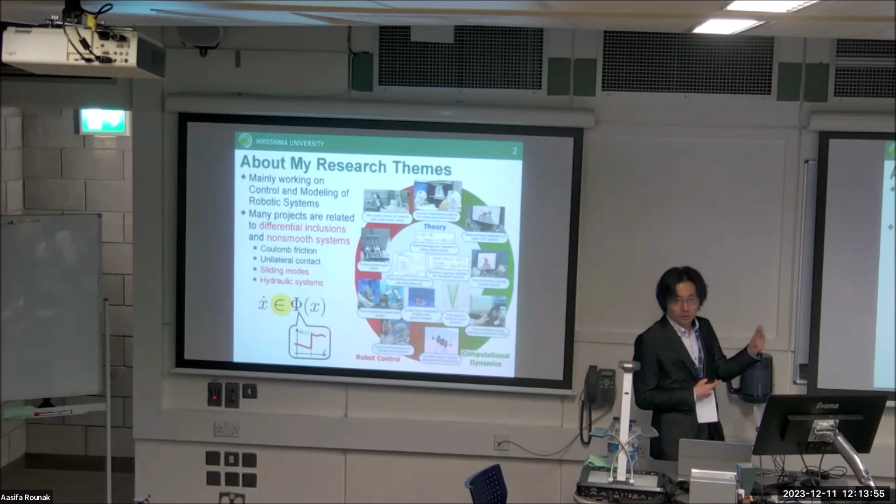But recently, I started working on hydraulic systems, and I noticed that hydraulic systems can also be described as differential inclusions using set valued functions. I applied that way of thinking to the modeling and also the control of the systems.

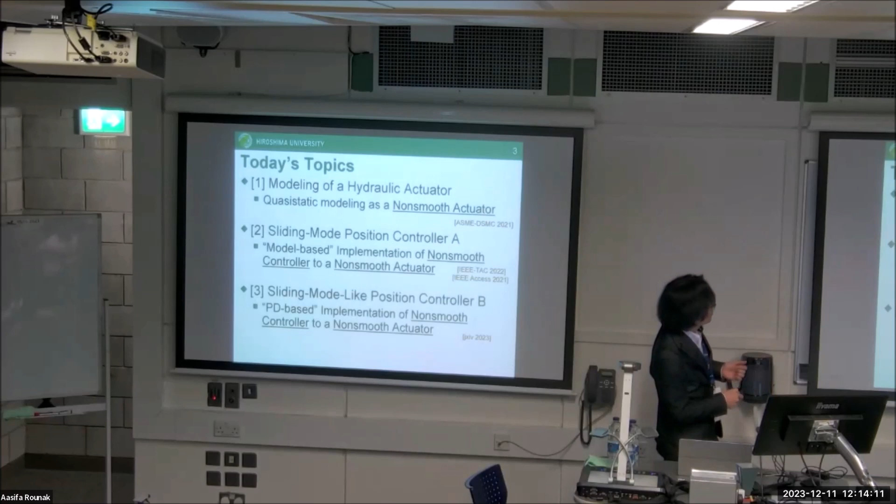Today's topics, there are 3 topics, and it's a very quick overview of 4 of my previous papers. One is still under review, and one is modeling of hydraulic actuator. I say it's quasi-static modeling, and I modeled it as a nonsmooth actuator.

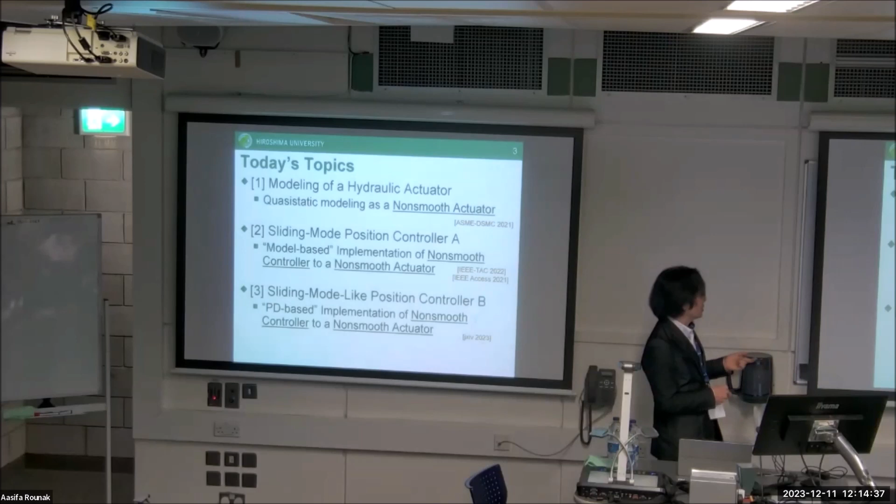I applied sliding mode position controller to such systems. As you might know, the sliding mode controller is a nonsmooth controller. It can be said to be a nonsmooth controller applied to a nonsmooth actuator. And I invented 2 ways to implement such controllers, such actuators.

Okay, the first one is about the modeling of hydraulic systems. The motivation came from collaboration with a construction manufacturer of excavators. You might know this kind of excavator - it's Kobelco Construction Machinery.

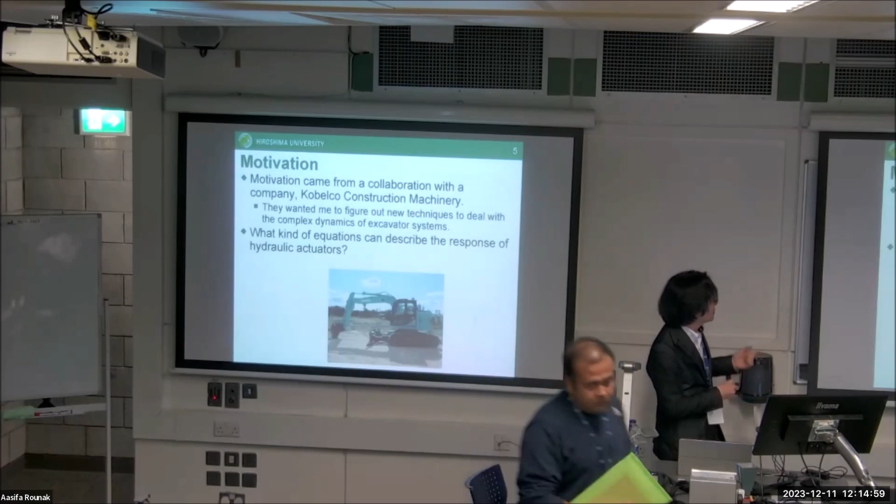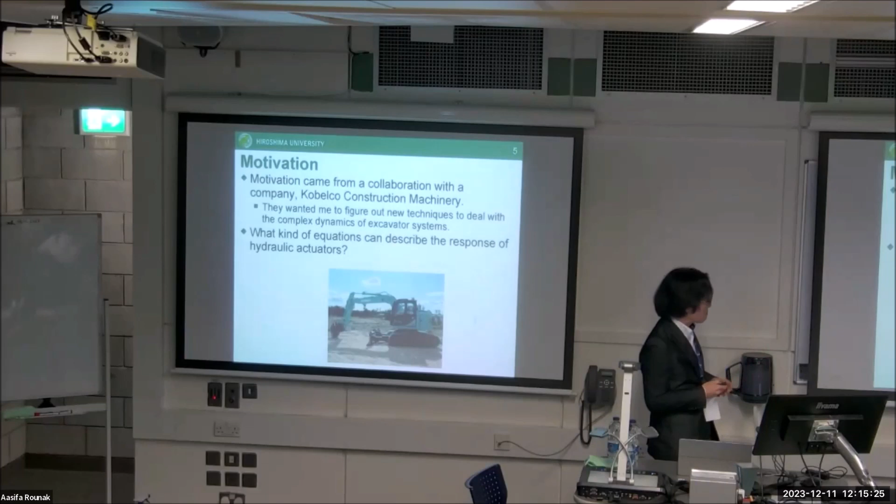They wanted me to figure out new techniques to deal with complicated dynamics of excavator systems, especially hydraulic systems. They invited me to operate the excavator, and I found that the response of the excavator was very interesting, and I couldn't figure out what kind of transfer functions could describe the response. So my academic motivation became: what kind of equations can describe the response of hydraulic systems?

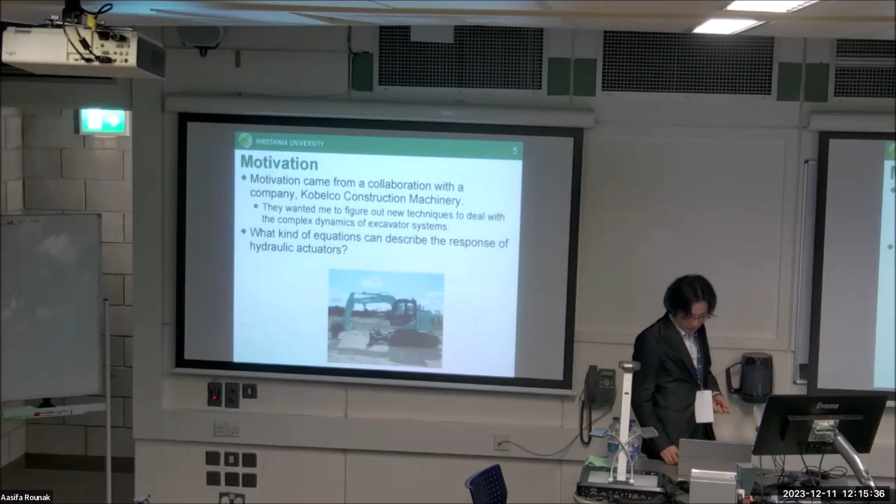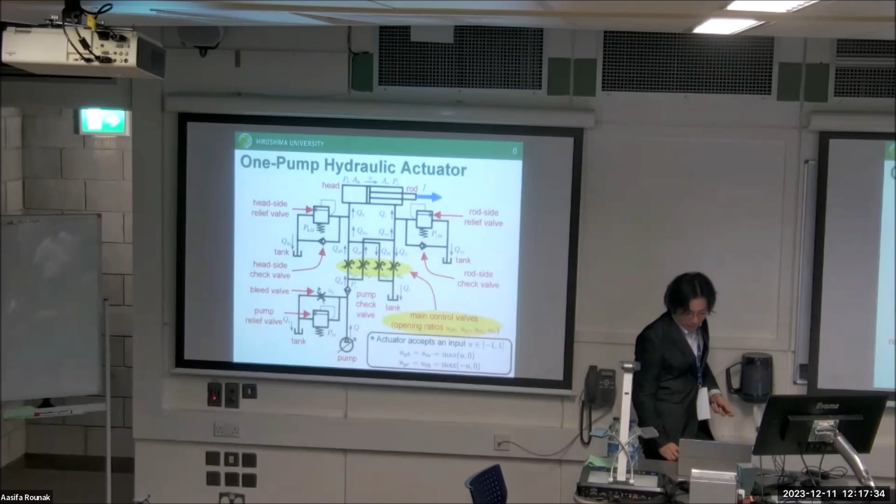Okay, this is a quick explanation of how it works, and it is nonsmooth. Nonsmoothness happens especially when all valves are closed. When all valves are closed, it doesn't move. But when there is an external force applied here, the oil must escape from these relief valves.

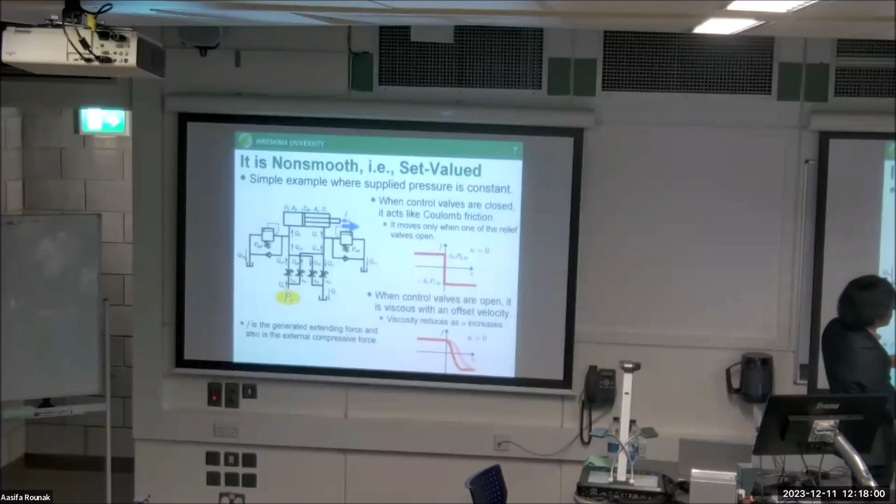So it acts like that. It means that when velocity is zero, the force can be any value between the relief level. When the external force exceeds this level, then the actuator starts to move like that. The same thing happens in the opposite direction. So it exactly acts like a Coulomb friction function.

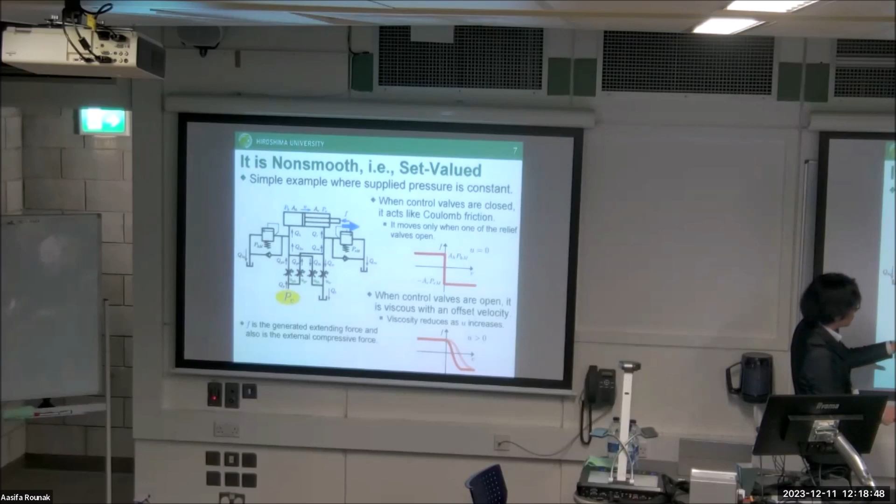Also, when these valves are open, it acts like a nonlinear viscosity with saturated force, and as the opening ratio U becomes large, it becomes less viscous. The viscosity takes place because of the resistance of these valves.

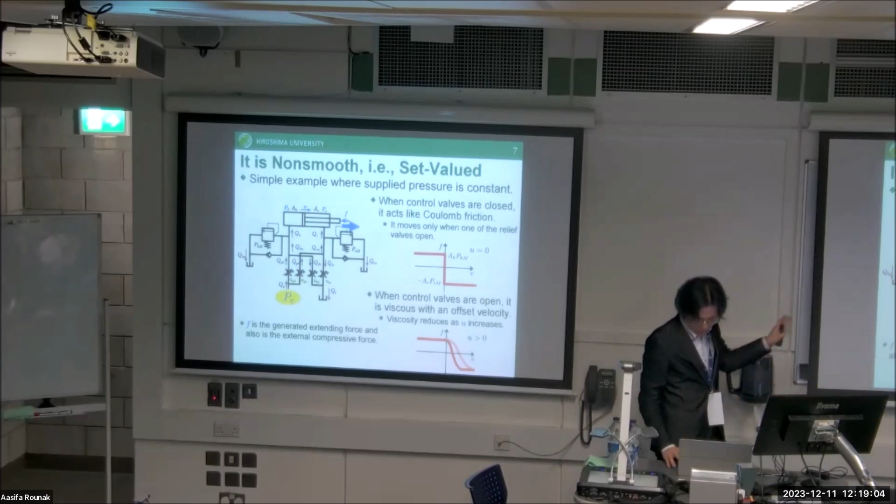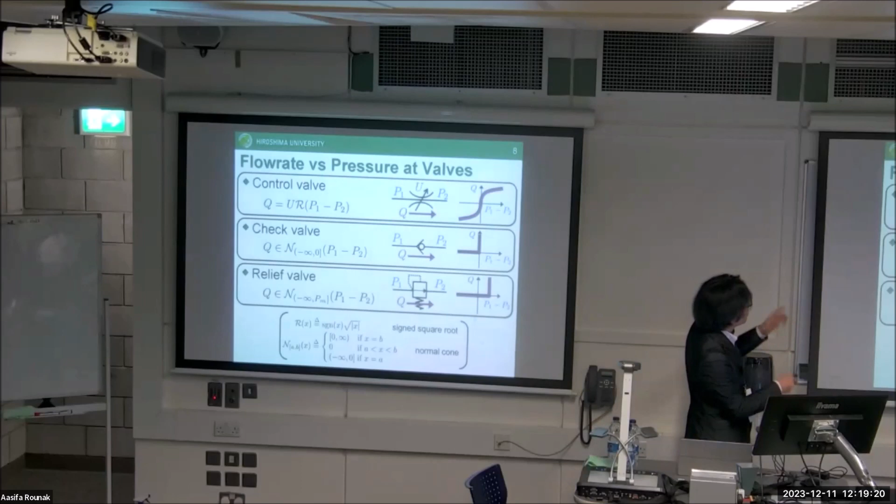This is a very quick, intuitive understanding of this system, but I try to express these features mathematically, and at the component level, at the control valve, we have to consider the pressures and flow rate relation.

And there is a control valve like that. There is a pressure on this side, and there is a pressure also on this side, and the pressure difference causes the flow of oil.

And the relation can be described like that. And this R function, it's what I define. It's a signed square root. Okay, and this is a kind of typical way of representing the flow rate.

And check valves and relief valves can be described like that. It's exactly like a diode in an electric system. And we can describe the relation by using the normal cone functions, which can be defined like this.

And yes, it means that the flow is allowed only in one direction. So negative flow is not permitted. So the pressure difference and the flow rate can be connected by this kind of set valued nonlinear function.

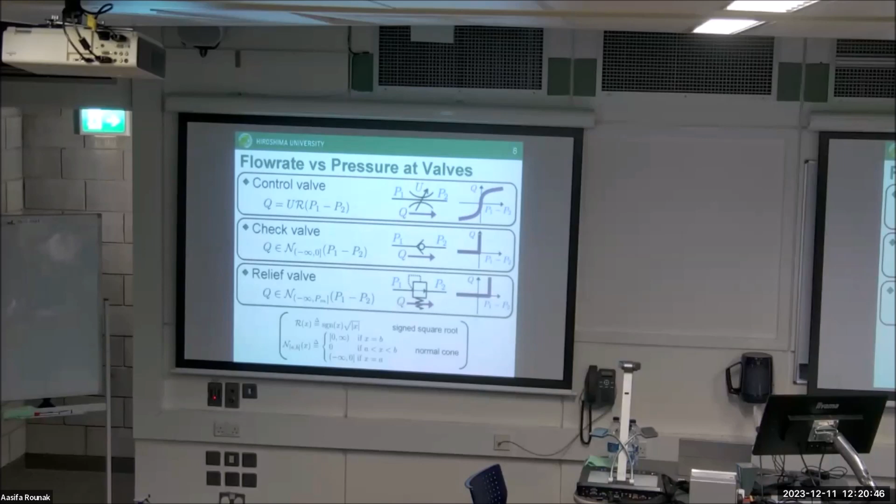And the relief valve is also similar. It's like that. So the difference between P1 and P2 is upper bounded by this, like this.

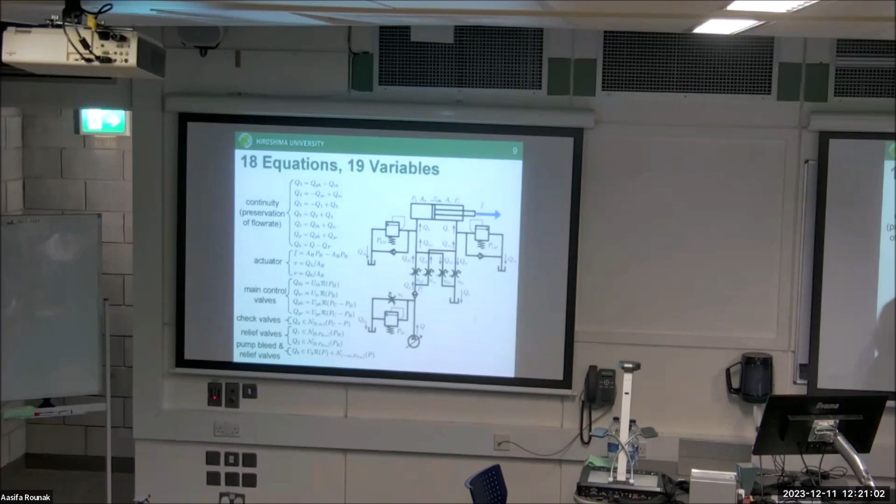And I applied this way of thinking for the whole circuit, and we obtained 18 equations at each valve and each junction of the circuit. And some of them are equalities and some of them are inclusions.

And there are 19 variables, such as the flow rate of each part and also pressure of each part.

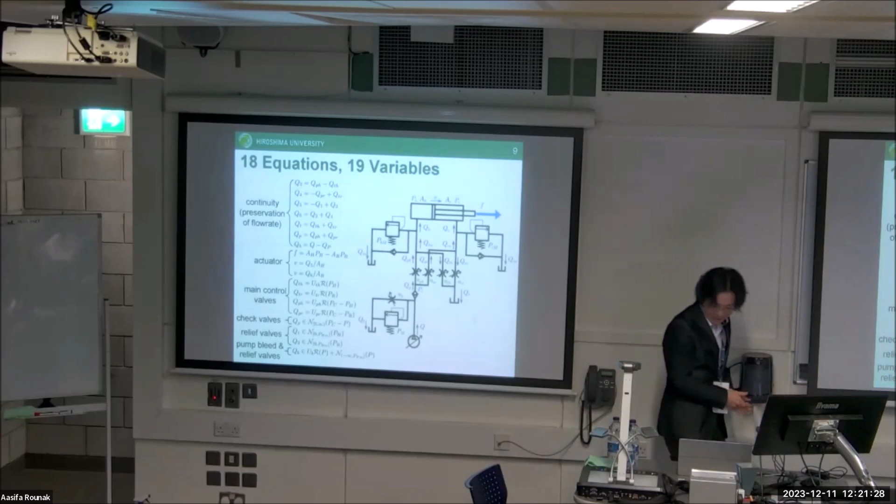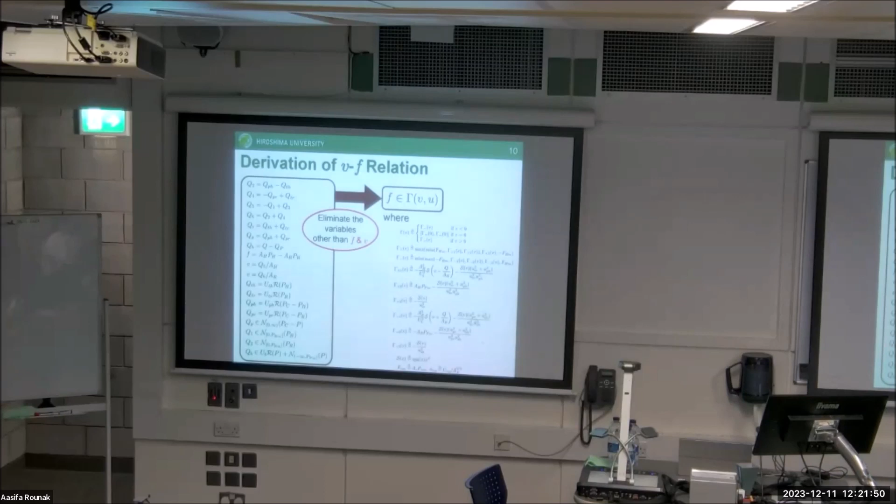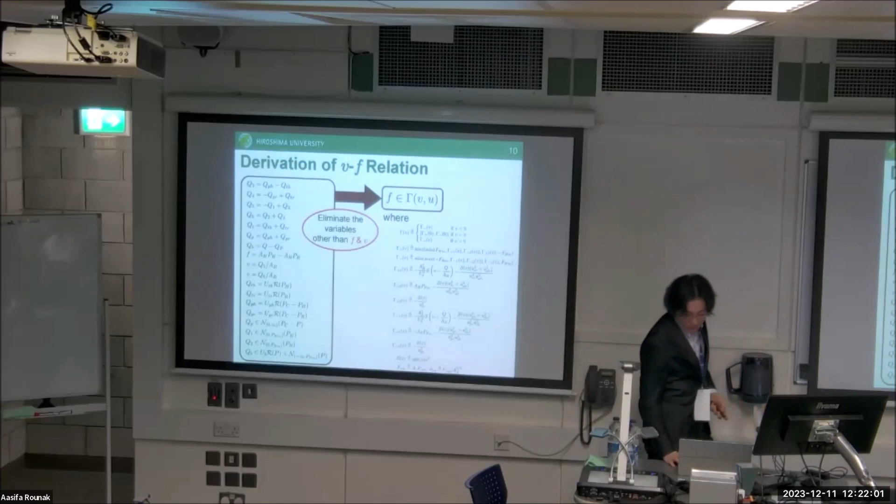And this function gamma, it is the set valued function. It can be defined like this. And it looks complicated, but it gives us quite an intuitive picture about how it works.

And it is basically, with a particular value of U, its graph becomes like that. It's a connection of several curve segments, like this. And each segment has physical meaning.

For example, in this section, the relief valve is open, and in this segment, it's an effect of the check valve in the circuit. And there are some segments, depending on the condition or open/closed states of some valves.

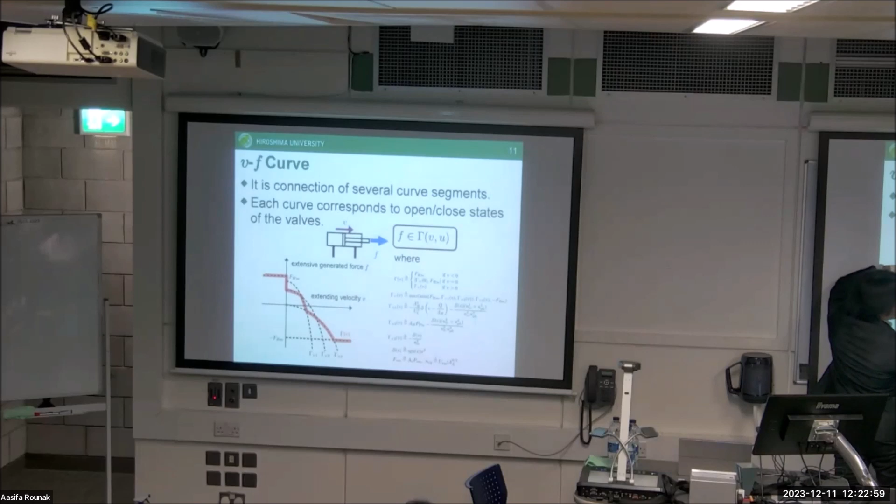And the important thing is that the force is bounded, upper bounded and lower bounded, and there's some set valuedness, non-smoothness here. And this curve changes according to U.

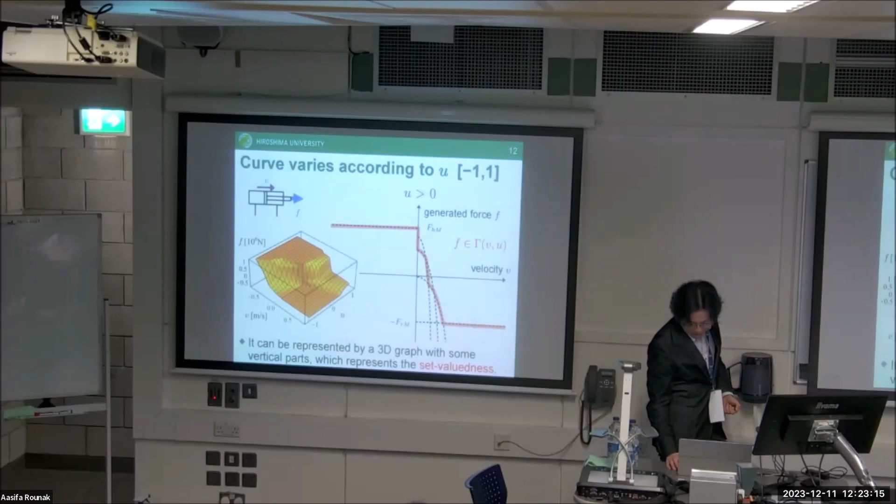Well, if we map this into the three-dimensional graph with velocity, force, and the control input U, it becomes like that. So there are some vertical parts, and it represents the set valuedness, meaning the non-smoothness.

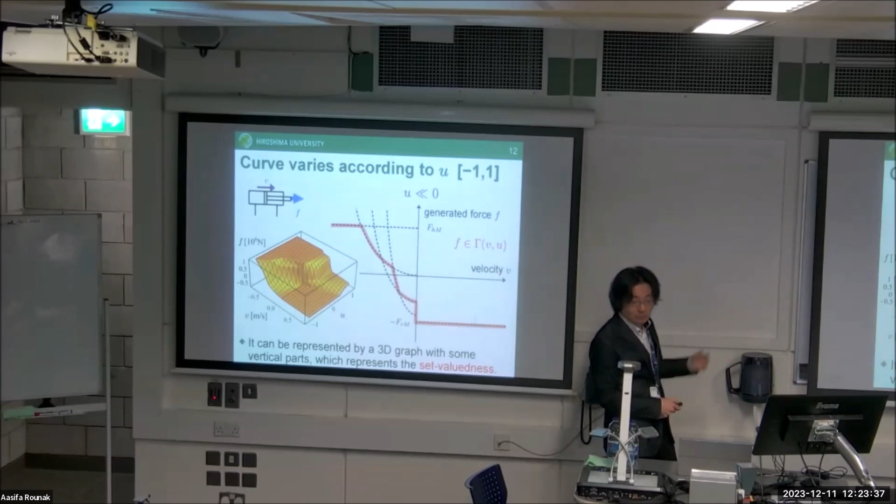Okay, then now we got the set valued actuator, but set valuedness means that the force can be any value between some value and some value, but it sounds like the force is not determined. So the force is indeterminate. Actually, when the actuator itself is alone, not connected to anything, then we cannot determine the force.

But when it is connected to something else, we can determine it. For example, in this case, we assume that the mass is connected here, and there is external force G here, and then there is the equation of motion of this object, and this force is the actuator force.

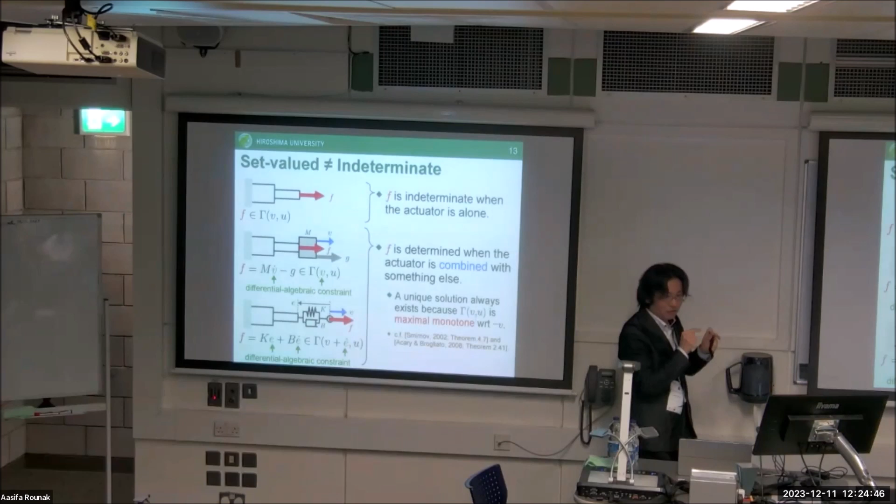So the actuator force comes from the actuator, the non-smooth actuator, and so here we have V and V dot. It means that there is a differential algebraic constraint, determining V, and once we determine V, we can determine F. So it doesn't mean indeterminate.

It does not mean that the force is indeterminate. And a similar thing can be said about this situation where it is connected to spring and damper, and in such case, the spring damper force is here.

So here we have also a differential algebraic constraint with respect to E. So we can determine that. We can determine E, and also we can determine F.

And so you may wonder if there is guarantee of uniqueness of existence, but it is relatively easy because the gamma function I showed you in the previous slide is maximal monotone with the negative of V.

So it's quite easy to prove that there is always a solution. And if we want to do simulation of this system, we can discretize that.

This equation of motion is discretized by the backward Euler method, with discretization using the sampling time step size t, and we have this equation constraining the unknown f, which can be solved like that.

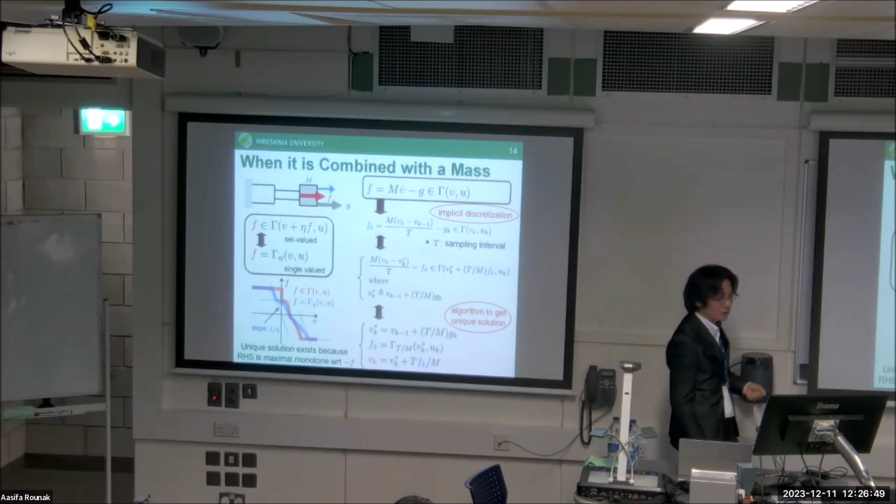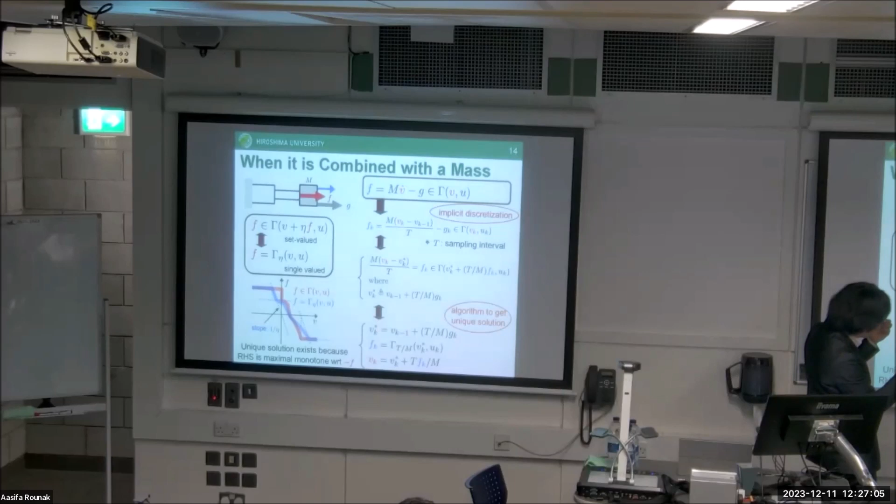To do that, we have to define another function gamma eta, which is a slanted version of the function gamma, but it's single valued and can be defined uniquely. By using that, we can describe the discrete time solution, this algorithm to compute and integrate that in discrete time.

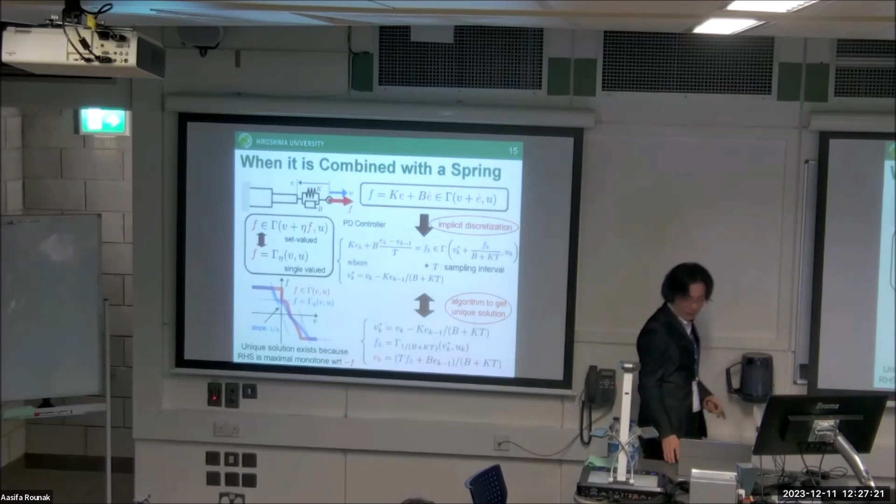The same thing can be said about this system with spring, and we end up in this algorithm. We applied this one to develop a real-time simulator based on the second version, the connection with spring damper system, and now we are using that for preliminary checking of the controller.

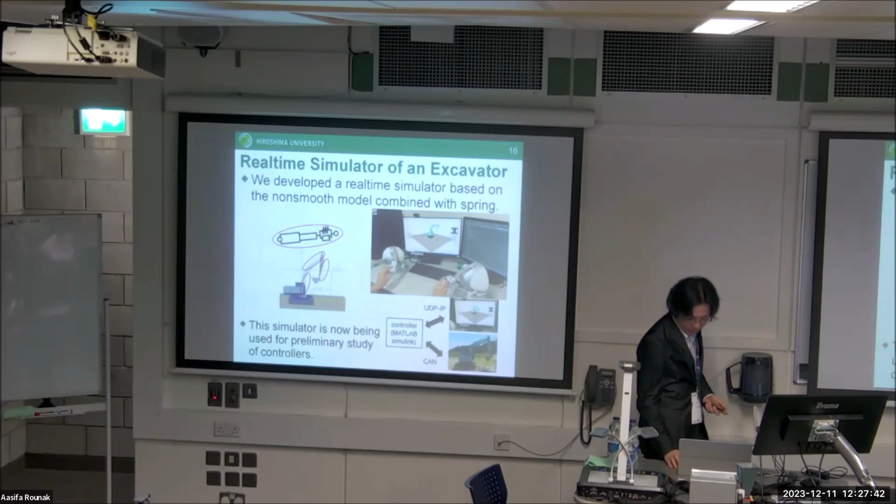Okay, and this is the first topic. The second topic is a model-based implementation of sliding mode controller, a non-smooth controller, for non-smooth actuator.

Now we have a non-smooth actuator, and we have to control it. Specifically, we have to control the position of the actuator. We assume it is connected to a mass, and the position can be measured by a position sensor. We have to construct a controller to make the position follow the desired position PD.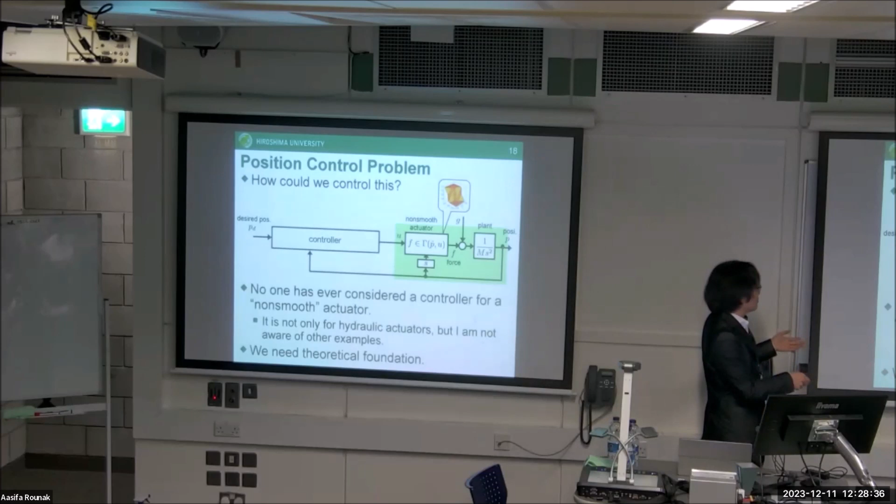No one has ever considered such a non-smooth actuator. It is not only for hydraulic actuators, but maybe there might be some other non-smooth actuators, though I'm not aware of other examples. Anyway, we need a theoretical foundation to develop this controller.

In such a case, the straightforward way is to manipulate the force that the actuator can produce. If the reference force can be commanded from a controller, then we can use some common position controllers. Let's say we have a common position controller F hat that produces F hat, this reference force, and if this reference force can be translated here, then we can control that.

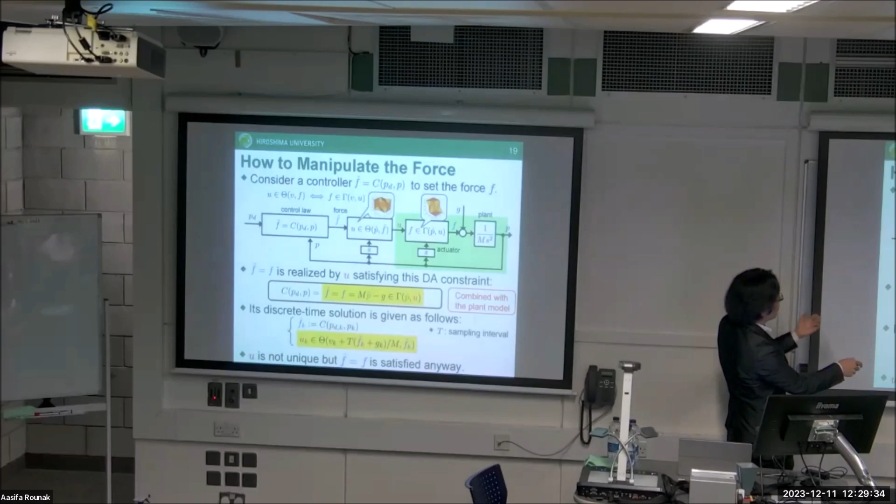But there is something different here, and we can put some inverse function of gamma here. But we cannot guarantee, it's not clear how F hat, F and F relate, we cannot guarantee that they are equal to each other.

We have to remember that this is determined by the differential algebraic constraint in the plant, which means the actuator force and the equation of motion of the system, if it's determined by this constraint, we have to use this information to determine F.

In discrete time, as I showed in the previous slide, the discrete time algorithm computes this part, and we can put this here, and then construct a controller like this. This is the basic way of thinking to construct the model-based implementation of this system.

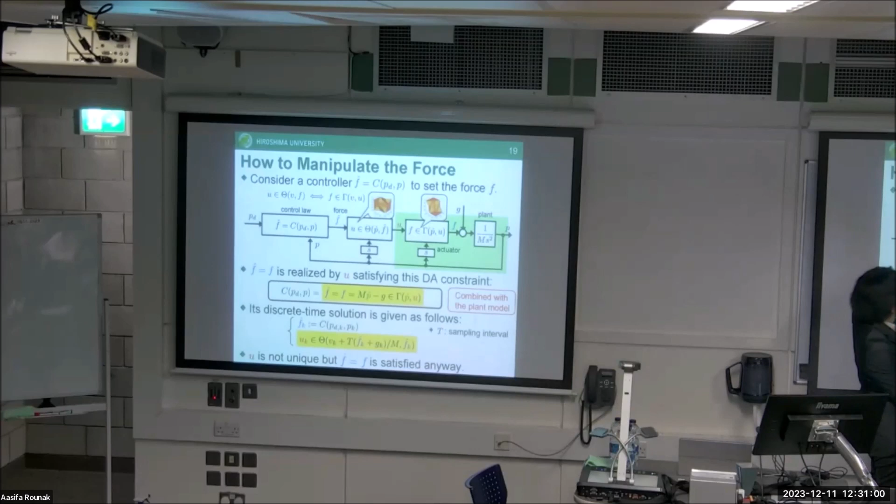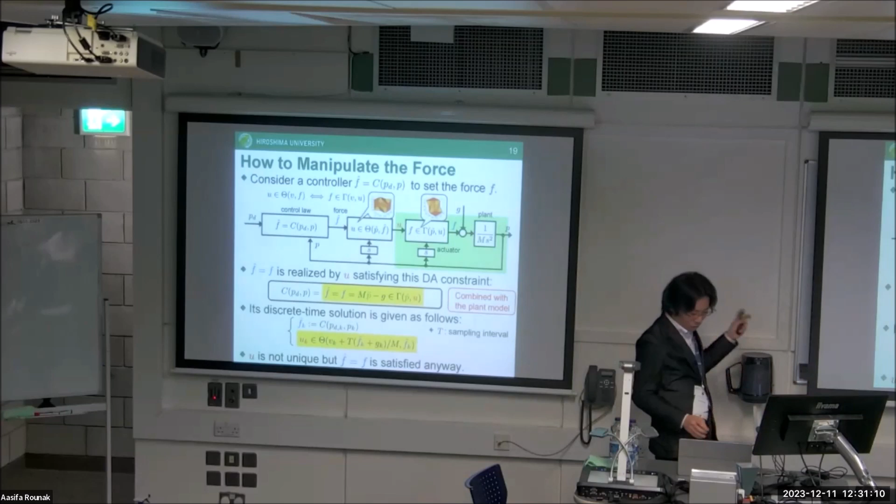But here, if the force F with common controllers can be any value, this actuator is saturated, it is bounded, so we cannot use just any controller. What we can use is only a limited class of controllers.

So we constructed a sliding mode controller, which is basically switching between the maximum force and the minimum force, to constrain the system on the sliding surface in the state space.

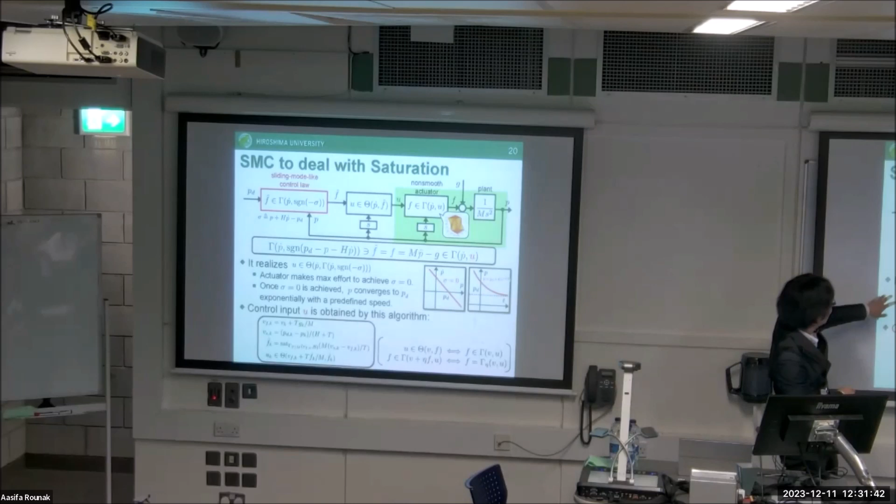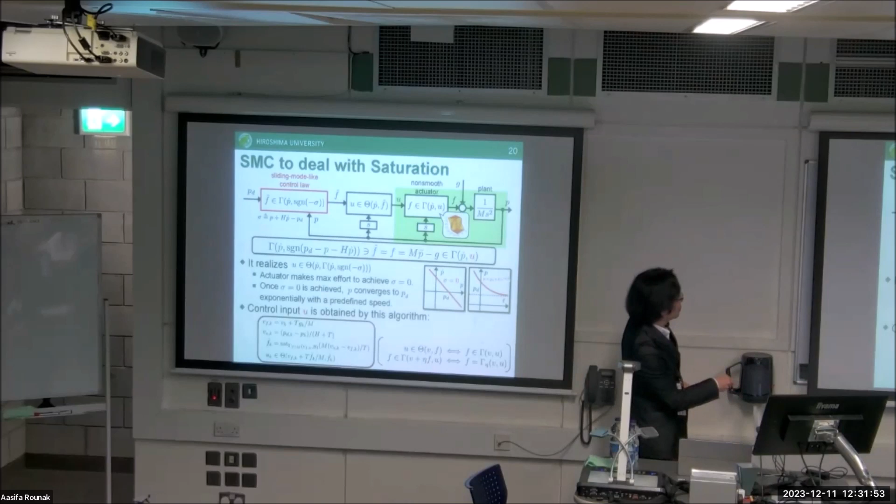We put the sliding mode controller here, and it makes the actuator produce the maximum effort to achieve the sliding surface. By discretizing that, we arrive at this controller and we apply that.

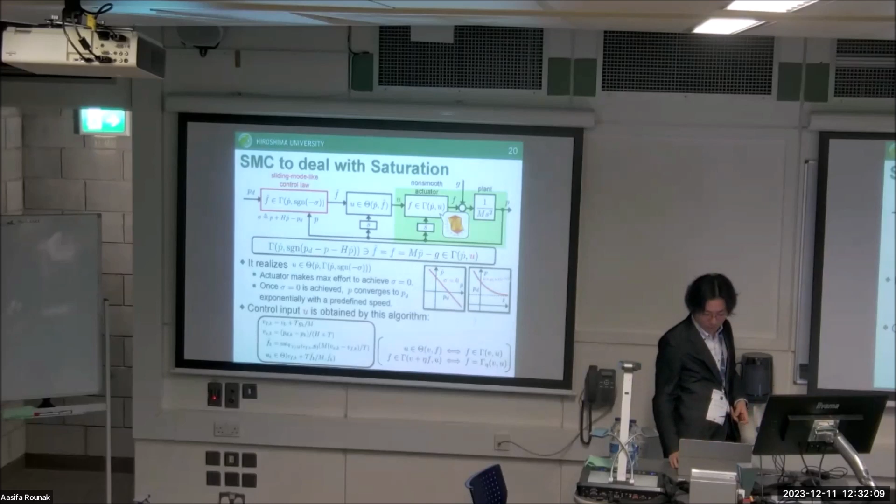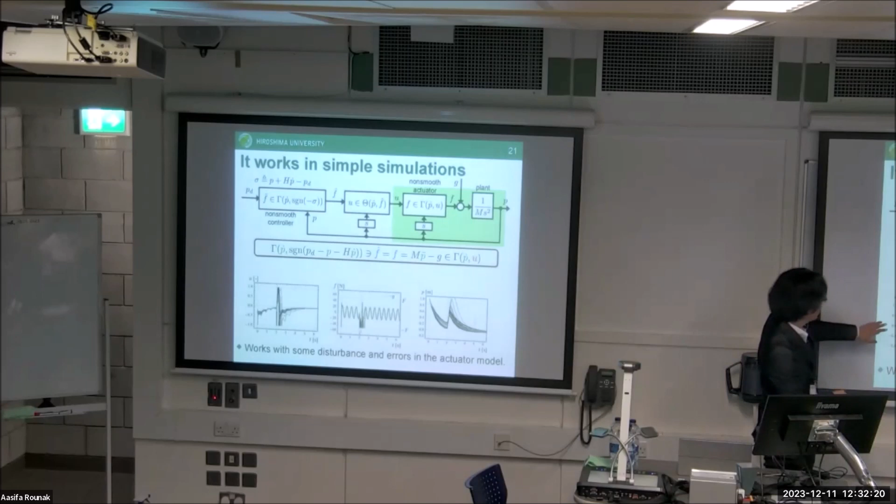By discretization we obtain this algorithm, and it works in a simple simulation, exponentially converging to the desired position, even when there is some unmodeled disturbance and unmodeled plant error.

And how long do we have? Sorry, okay.

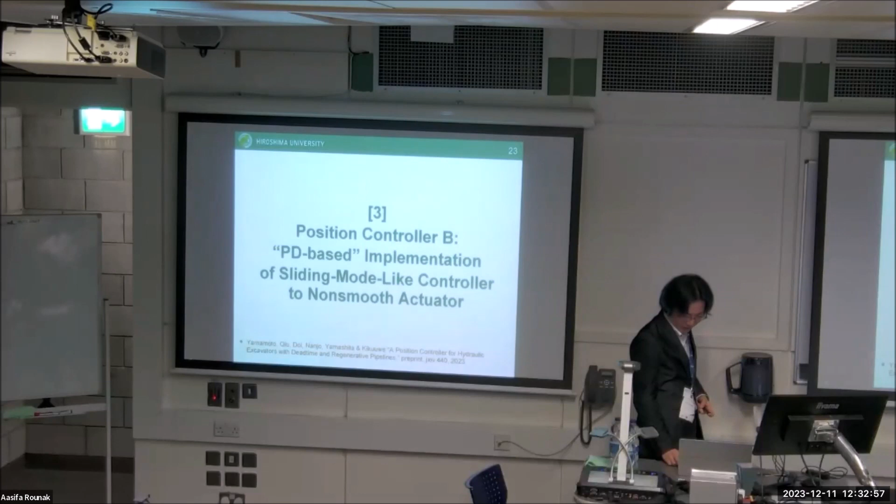Yes, it works in the excavator. We applied that in the excavator, but we needed some dead time compensation for this. Okay, sorry, yes, I applied this one.

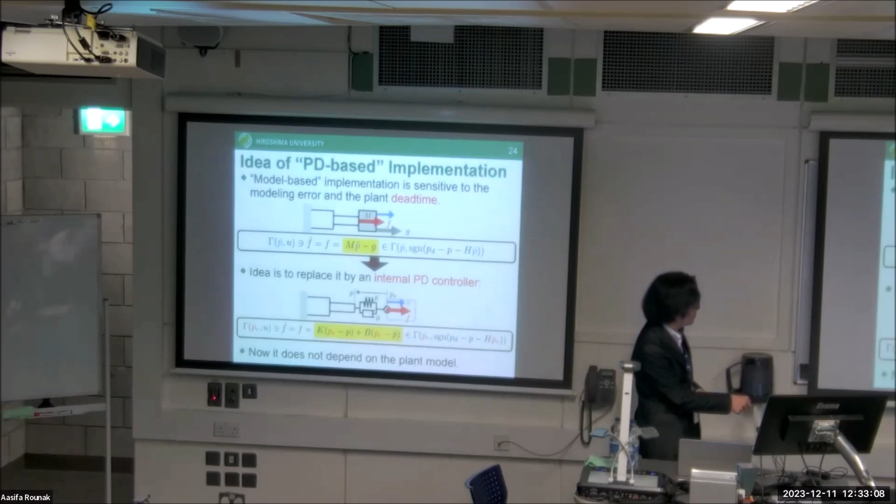The second way of thinking, with the spring and damper system, I did a similar thing, and it works better than the first one.